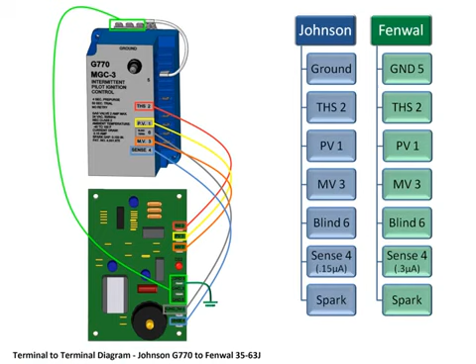The sequence of operation begins with a 24 volt AC call for heat arriving at terminal THS2. During step 2, the LED flashes once, while verifying no microamps were present at terminal 4.

Step 3 is a delay of 4 seconds to purge the combustion area of gas prior to a trial for ignition, known as pre-purge. Step 4 is the trial for ignition, which allows 24 volts AC output from PV1 and spark for up to 50 seconds.

Step 5 occurs within that 50-second trial, when rectification of a minimum of 0.3 microamps is present at sense terminal 4, causing the sequence to proceed. Step 6 occurs when pilot rectification is confirmed. 24 volts AC is output from MV3 until either rectification is lost or the call for heat is removed.

Step 7 occurs if rectification is lost during the MV output, but the call for heat was never interrupted. After 15 seconds of interpurge pause, the module restarts at step 4.

In step 2, if microamps were present before a trial for ignition, the module locks out and flashes the LED 2 times, pauses for 3 seconds, and repeats this until the call for heat is reset.

In step 5, if the microamps never reach 0.3, the module locks out and flashes the LED 3 times. It pauses for 3 seconds and repeats this until the call for heat is reset.

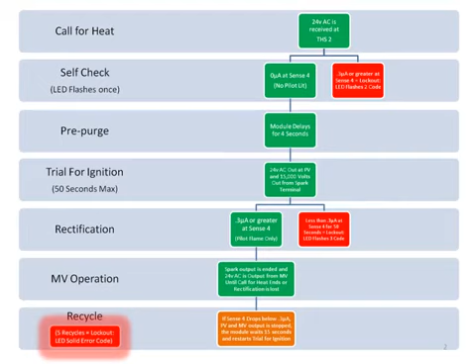When no call for heat is present, the gas input to the gas valve is stopped at the pilot solenoid.

The pilot, module, and specifically ground terminal 5 should all be well grounded. Also note the blind terminal 6 has no foil traces to it on the board, so it is a terminal with no connectivity to the module.

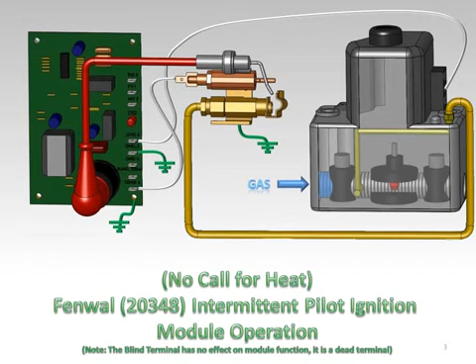The call for heat is shown here, arriving at terminal THS2. This 24 volt AC input triggers the module's sequence of operation to begin.

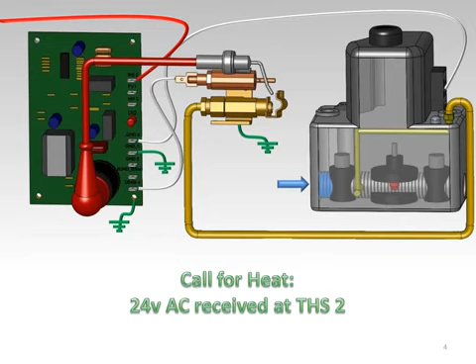In step 2, the LED will flash 1 time as the module verifies there is no rectification at terminal sense 4.

After a 4-second wait called pre-purge, 24 volts AC is sent out from PV1 to the pilot solenoid at the gas valve, and spark is sent out to the pilot assembly.

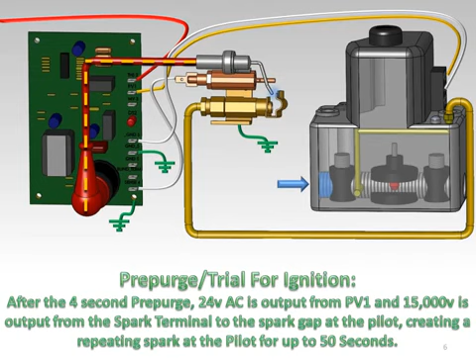The pilot solenoid opens, sending gas to the pilot assembly, and the spark ignites the gas, creating a pilot. Note the pilot contacts the flame sensor when lit, generating microamps.

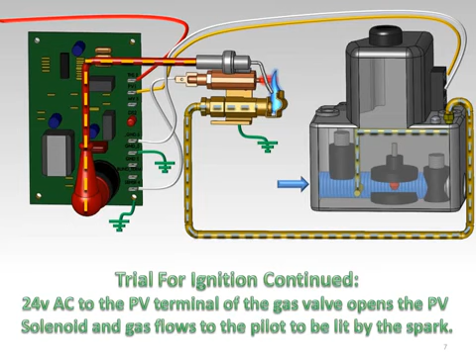When the microamp rectification of the pilot exceeds the minimum of 0.3 microamps, the module allows the output from MV3 to the main solenoid of the gas valve. Also, the spark output is terminated when the pilot is rectified. Typically, the microamp current will be much higher than the required minimum in a properly functioning oven.

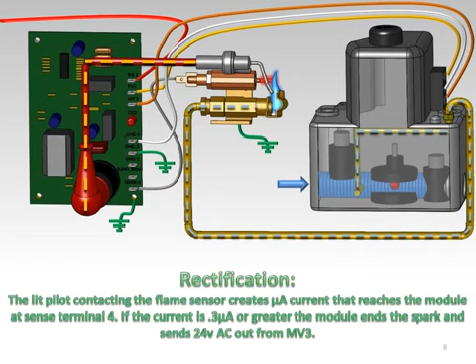The main solenoid of the gas valve opens, and gas is sent to the main burner. Notice the main burner output is regulated by the valve's internal regulator, but the pilot gas output is controlled by the screw under the cap next to the pilot output.

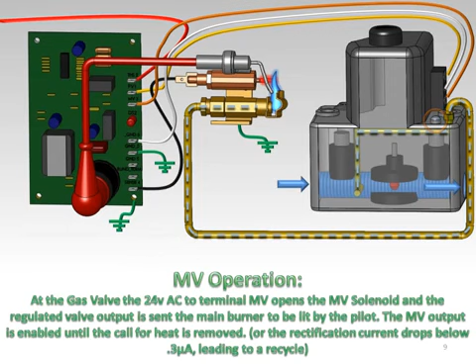If rectification is lost during MV output, the module stops the MV and PV output. The gas valve closes both solenoids, and the pilot and main burner go out. The module pauses for 15 seconds, which is called the interpurge, and then restarts at the trial for ignition.

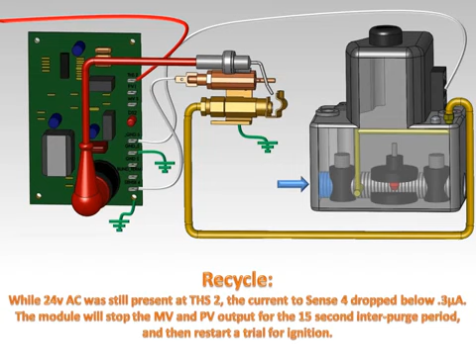If the module recycles 5 times, it locks out and the LED remains on solid. This is typically caused by a short on the MV circuit, such as the panel heat indicator light or the

MV solenoid itself. If the pilot comes on and goes out shortly after, disconnect the MV terminal wires at the module and reset the call for heat.

If the pilot stays on, check for shorts to ground by connecting the valve only or the light only.

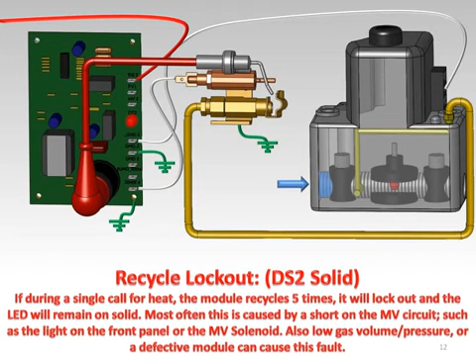If rectification is sensed during a self-check, the LED flashes 2 times, pauses, and repeats that code. This is a fault code that typically is caused by a pilot solenoid sticking open.

When the pilot solenoid does not close 100%, a reduced pilot can still rectify, and the module will lock out. If the pilot remains lit with the unit turned off, the gas valve must be replaced.

If the gas valve fails open, verify the axial cooling fan is working properly and the unit's control side is not exposed to a heat source, such as a range or a charbroiler.

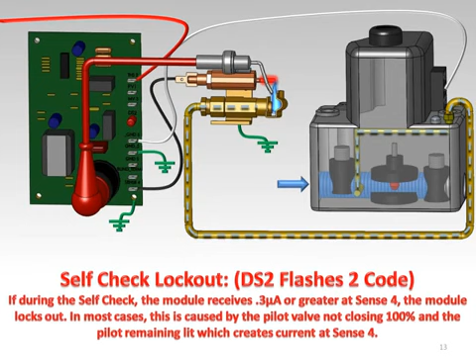If during the trial for ignition the module never rectifies the pilot, it will lock out and flash 3 times. To troubleshoot this code, begin by observing the pilot.

If the pilot is lighting but the code still comes up, check the microamps at terminal 4. Put your meter in series with the disconnected wire and the empty terminal, and while the pilot is lit, record the microamps average reading. If it is below 0.3 microamps, check the flame sensor for carbon buildup, a damaged sense

wire, damage to the flame sensor insulator, the grounding of the pilot or the module, and finally the gas pressure at the pilot. If it was above 0.3 microamps, but the module still locks out, verify ground, and if it is present, replace the module.

If during the trial for ignition, the pilot does not light, but the spark is present, check the PV input at the gas valve, the pilot gas pressure at the pilot assembly, or the spark gap.

If no spark was present, create a jumper wire, and ground one end while holding the other end in a pair of insulated pliers an 1/8 inch above the disconnected spark terminal.

When the call for heat is reset and the module enters the trial for ignition, the spark should arc from the spark terminal to the grounded jumper.

If it does not spark to the jumper, verify ground from ground 5 to the unit and try again. If no spark is present, replace the module.